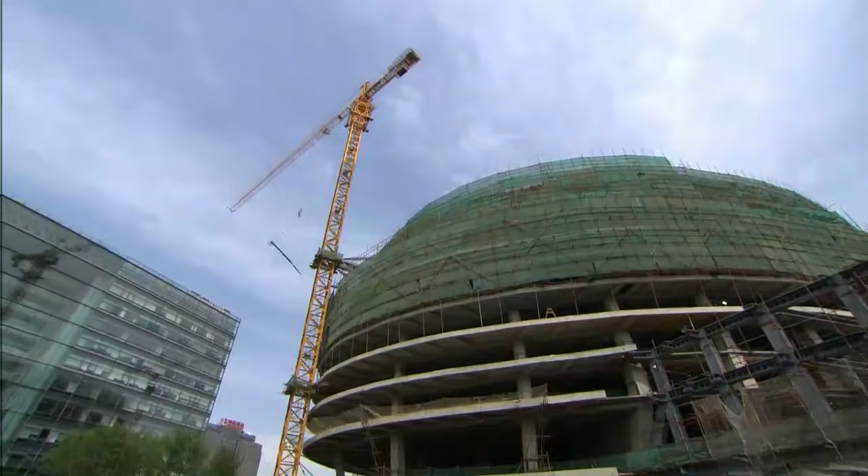21st century China is a nation on the rise. Its economy and industry growing at lightning speed. But the country faces a huge challenge. The north is drying up. China's growth is threatened.

Northern China's water shortage is affecting its social and economic development. The situation is critical. Enter one of the most ambitious engineering projects of modern times. The South to North Water Diversion Project is absolutely essential for solving North China's water shortage.

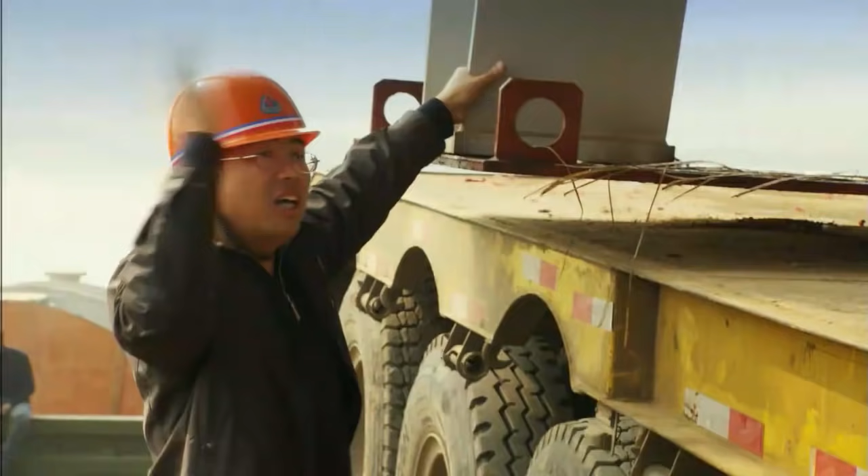A record-breaking chain of waterways, dams, tunnels and giant aqueducts to rescue China's parched north. Nothing has been tried on this scale before. It's a giant gamble. China's engineers are stepping into the unknown.

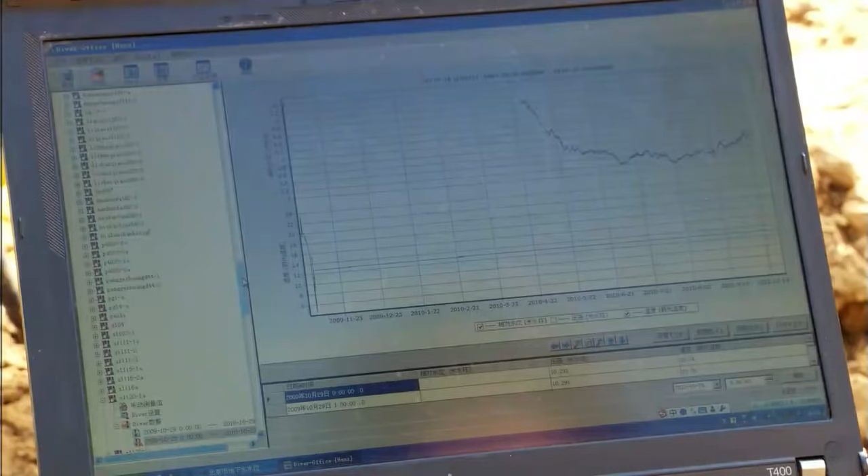6 a.m. on the outskirts of Beijing. Two researchers carry out a reconnaissance in China's battle with nature. Their task? To monitor Beijing's underground water reserves. We collect water pressure and temperature data from these outdoor test points in order to record changes in water levels underground in Beijing.

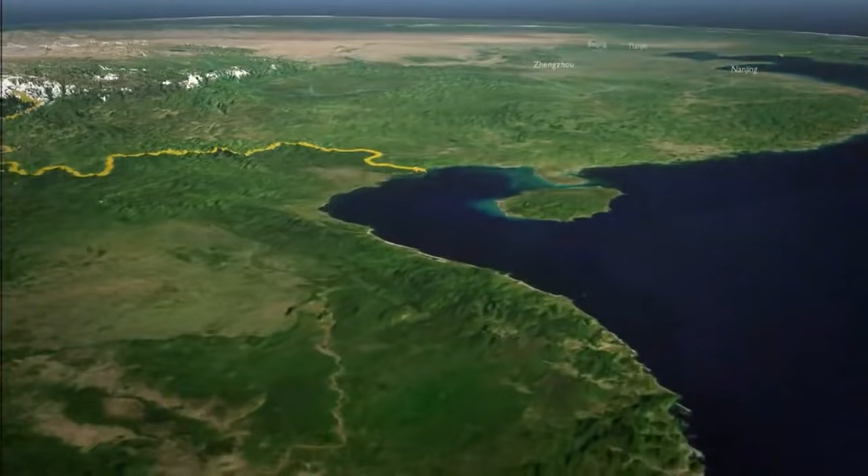Irrigated by some of Asia's largest rivers, southern China is green and fertile. But the north is a different story. Few rivers and low rainfall make this region of China naturally dry and semi-arid. Add intensive agriculture, rapid urban development and climate change to the mix, and the situation becomes critical.

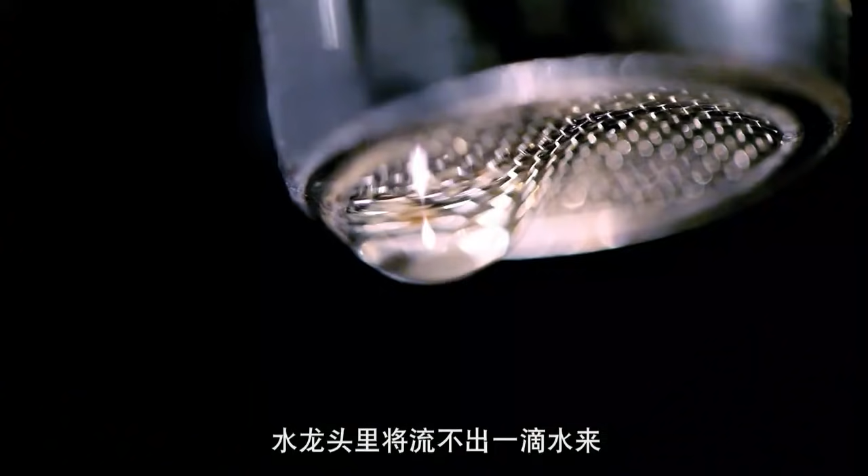If nothing is done, scientists estimate by 2030, northern China's taps will completely run dry. The shortage of water in northern China is caused by the region's dry climate. Population growth and economic and social development have made the situation even worse.

Something must be done, and fast. So, enter the three-pronged South-North Water Diversion Project. Still in the planning stage, the western route will divert water from the Yangtze headwaters to replenish the Yellow River. The 1,267-kilometre central route will divert water from the Han River to the northern cities of Beijing and Tianjin.

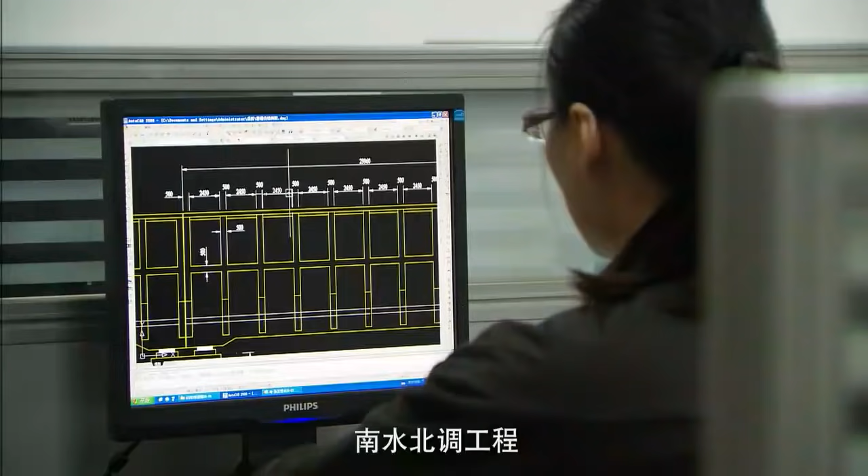If we don't move water from other regions and build the South-North Water Diversion Project, it'll be impossible to support economic and social development in the north. The most important link in the chain is the source of the central route.

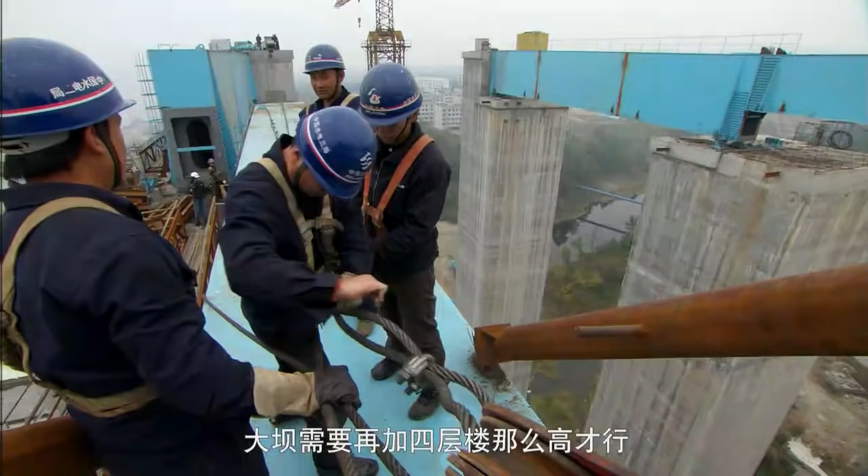Danjiangkou Reservoir will be the giant water tank feeding the taps of northern China. It holds enough water to supply New York City for 13 years. That's not enough to quench the North's thirst. The reservoir's capacity must increase by a massive 60%. But the Danjiangkou Dam is too small to hold that amount of water. It needs to grow in height by an extra 4 stories.

Building a new dam is like drawing on a blank piece of paper. You design how you like, but to enlarge a dam, you have to first carefully study the old one before putting pen to paper. Zhang Xiaoting is the dam's chief engineer. He must enlarge the 50-year-old dam using new concrete.

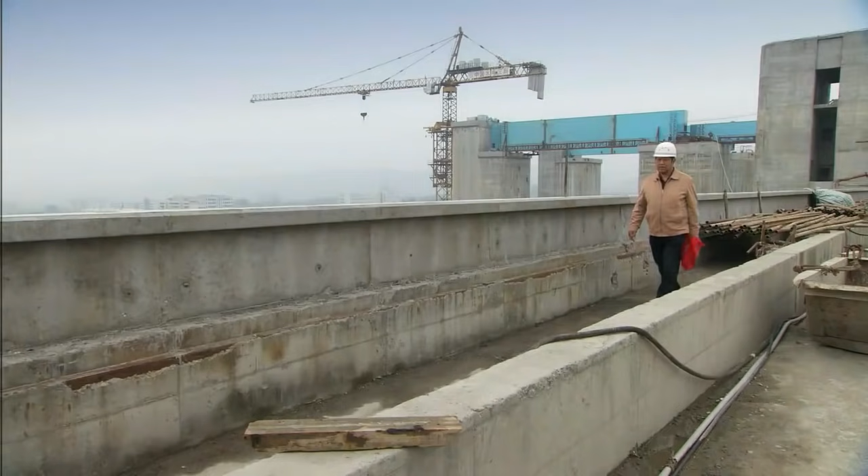The problem is, different vintages of concrete don't mix. When poured and set as one structure, standard construction concrete can withstand hundreds of kilograms of pressure. But if new concrete is poured directly on top of old, it's a different story.

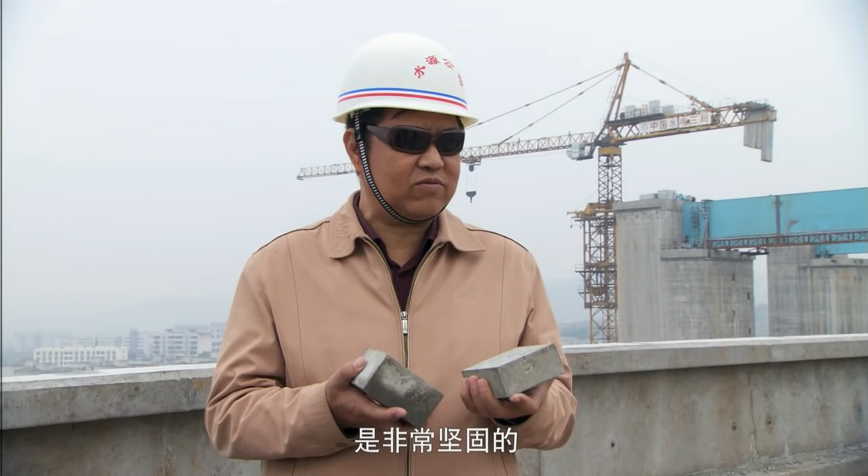This experiment shows that, despite concrete being strong, if we pour new concrete on top of old without surface treatment, the combination is fragile and weak. It breaks apart with very little force. Scaled up, this weakness would spell disaster.

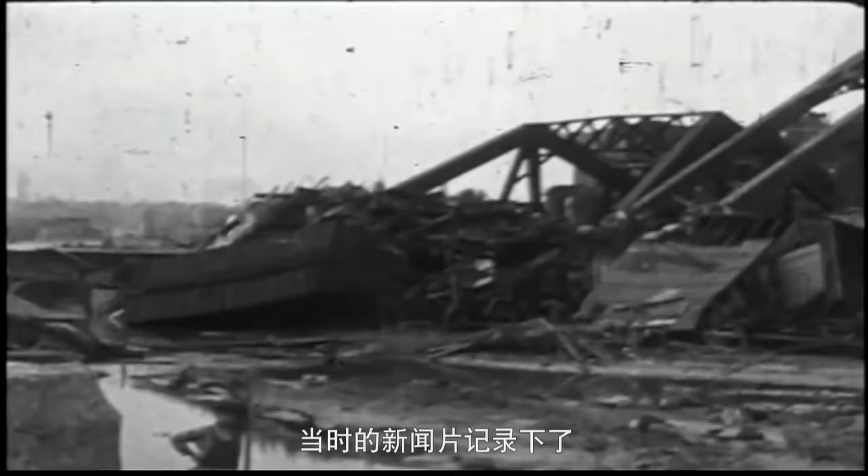In 1928, the St. Francis Dam in California collapsed, releasing a wave that swept everything before it. 450 people were killed. Newsreel depictions showed the horrifying scale of the disaster. Later analysis revealed the dam's failure was due in large part to the poor join between its concrete wall and the rock valley.

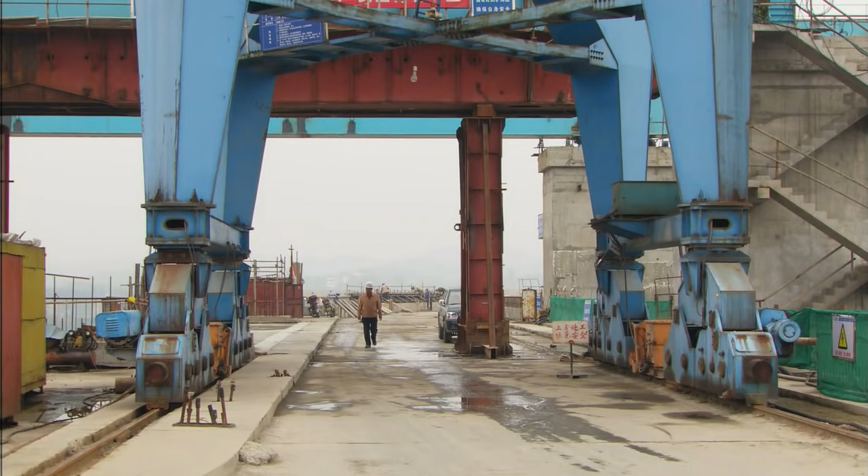This scenario is engineer Zhang's worst nightmare. He knows he must forge an indestructible bond between the old and new portions of the Danjiangkou Dam. So, he's brought in the demolition guys. Beginning in 2005, teams of explosive experts blew apart the dam's upper layers.

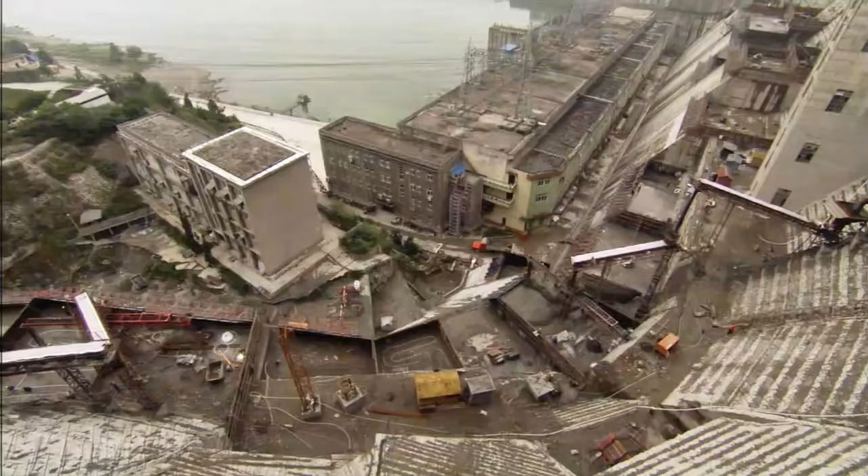And painstakingly scoured long grooves across its face. Next, Zhang's engineers drilled thousands of steel rods into the dam's broken-up exterior. Together, the chiseled grooves and steel rods anchored the fresh concrete poured on top, creating a super-strong bond between the old and new structures.

Over 4 years, the dam grew centimetre by centimetre, both in thickness and height, eventually reaching the 50-story target in 2009. The first building block of the world's most ambitious construction project is complete. Zhang reflects on his team's work.

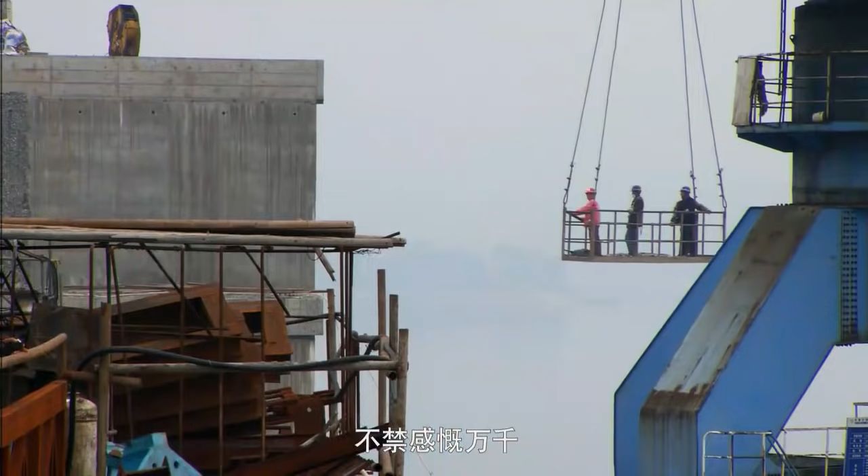When the Danjiangkou Dam heightening project is complete, we hydro engineers will be very proud to see water from the Han and Yangtze rivers helping the people of Beijing and Tianjin. The central route of the water diversion project is off to a good start.

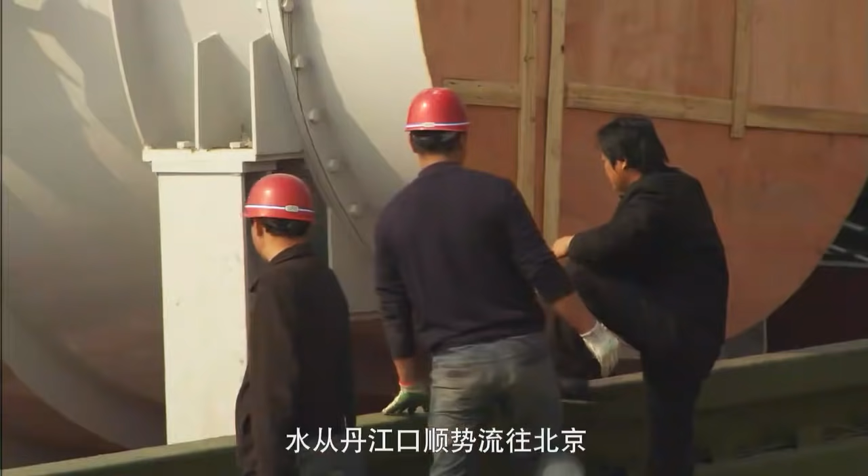From Danjiangkou, it's downhill all the way to Beijing. But over on the eastern route, engineers face an uphill battle, literally, to get the water to northern China. Dawn in Shandong province. The engineers building the Hanzhuang pumping station are up early.

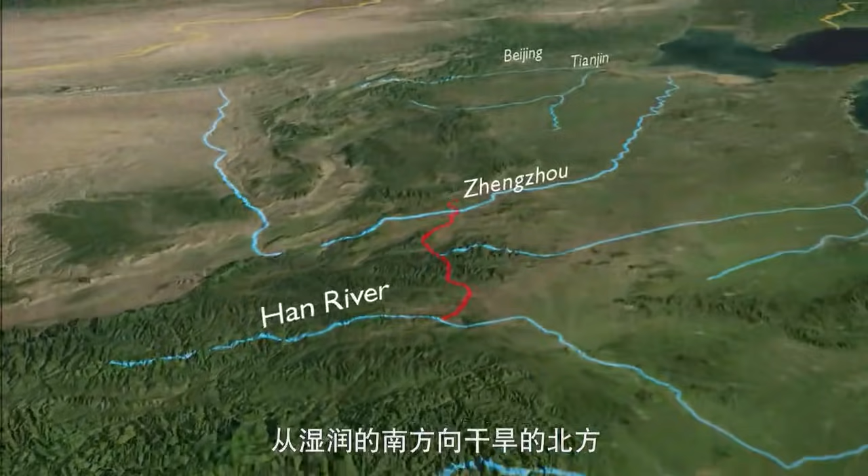The South-North Water Diversion Project will eventually divert almost 50 billion tonnes of water each year via 3 routes from the wet south to the parched north. Engineers hope 5 state-of-the-art pumps will be the driving force behind the project's eastern route, if the delivery goes smoothly.

For half of its 1,467-kilometre length, the eastern route's gradient is uphill. Without help, water the engineers want to go north will flow the wrong way. Their ambitious solution is building 22 pumping stations to push the water in the right direction. Ninth in the chain is Hangzhuang. It will pump water north into a series of lakes. The man in charge of its construction is Chief Engineer Zhao Xiaomao.

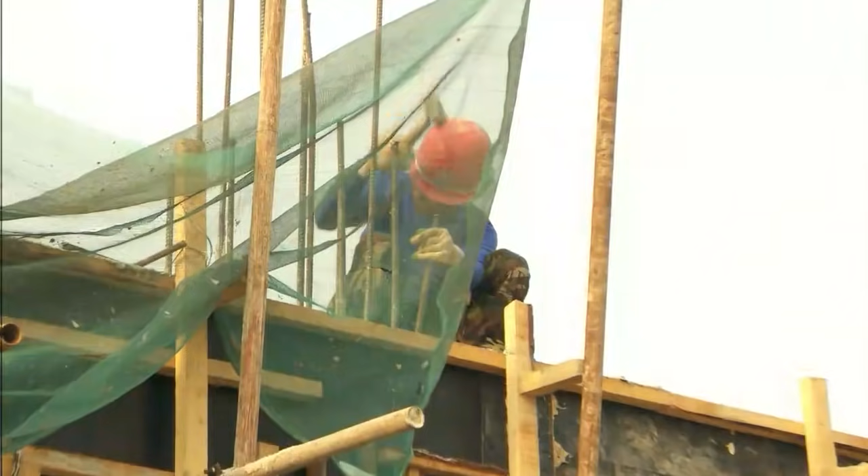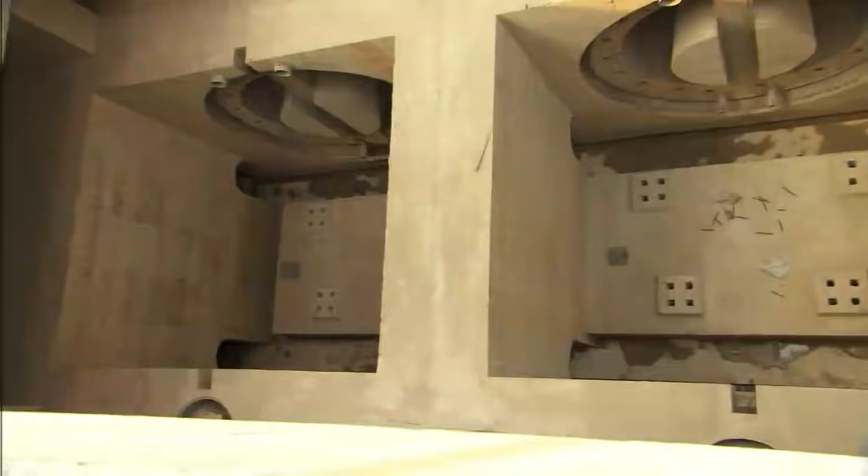His station must pump water up a steep incline at a rate that would fill 3 Olympic swimming pools every minute. 5 pumps at the bottom of the structure will do all the pushing. They work by spinning angled blades called impellers. These give water enough energy to overcome gravity. But pumping that much water 365 days a year makes for one big electricity bill. Zhao's team must find a way to keep costs to a minimum.

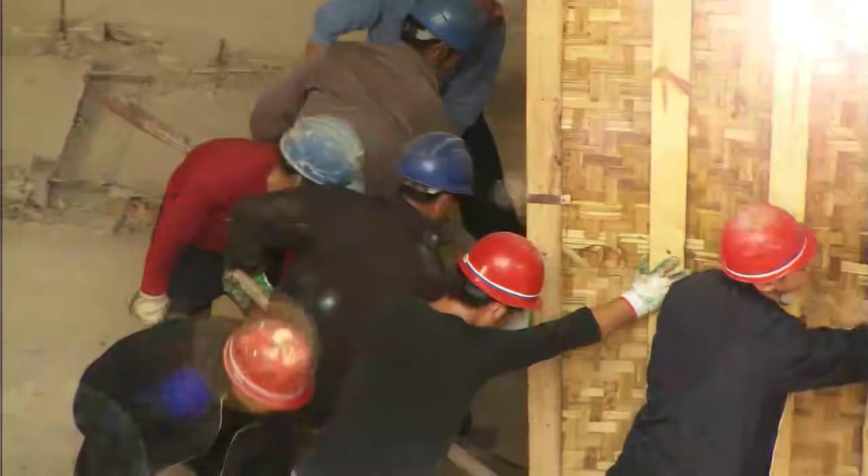During the design of the Hanzhuang pumping station, everyone wanted to increase the pump's efficiency. It's the most important aim of our design. A pump's induction motor achieves an efficiency of around 75%. The rest is lost in friction and heat. Hangzhuang's engineers needed more than 81% efficiency. To meet their target, they turned to state-of-the-art technology.

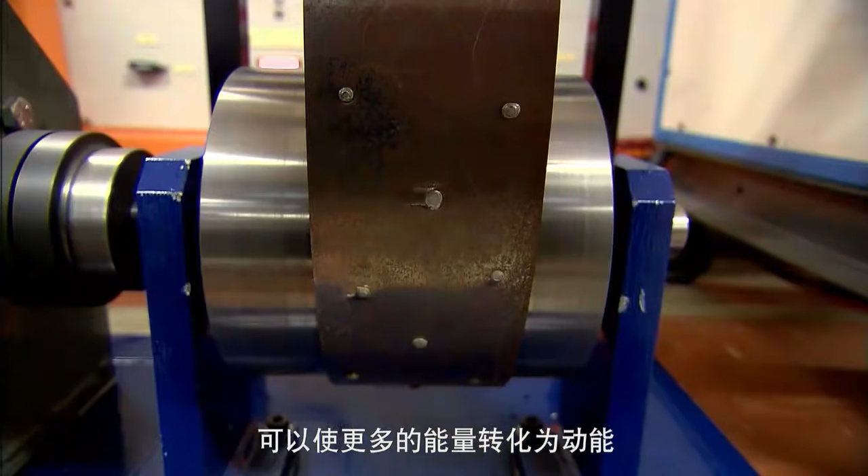Dr. Patrick Luk is a world expert on the mechanics of permanent magnet motors. Their components are made from rare supermagnetic metals. The result is more energy is converted into motion. Put head-to-head with an induction motor, these rare metals make a dramatic difference to efficiency.

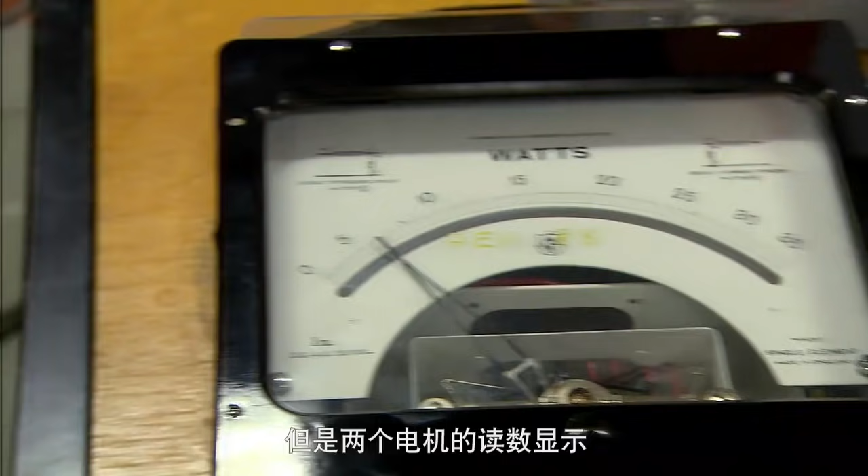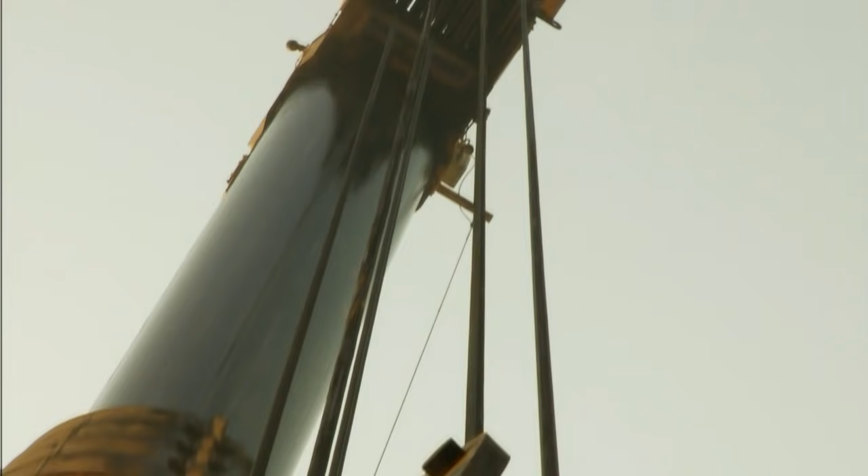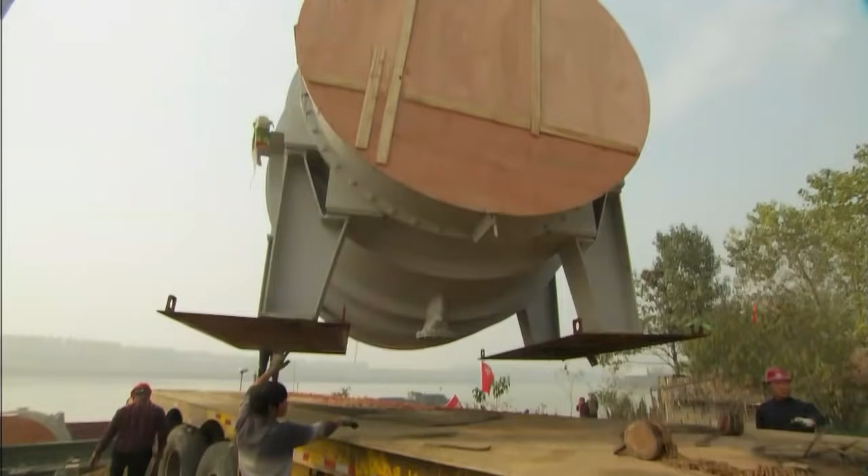But before they're up and running, Zhao needs to get his hands on them. Which means moving 300 tons of pump worth millions of dollars off the delivery barge and onto dry land. To make the move, Zhao's ordered a giant 80-ton crane. He holds his breath as the first 60-ton pump is lifted into the air. The pump finally touches down.

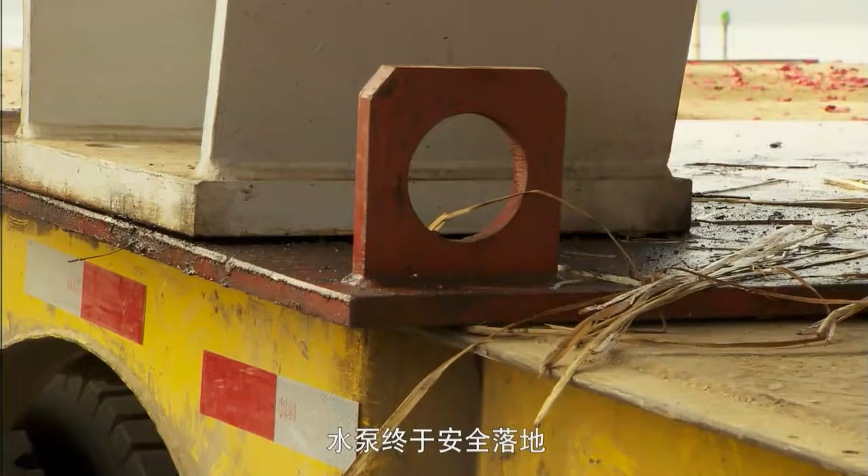In a week's time, Zhao and his team will begin installation. After the preparation comes the installation stage. I feel excited because after that, construction of the pumping station is more or less complete. By sunset, the last of the pumps is offloaded onto terra firma. Construction on the eastern route stays bang on schedule.

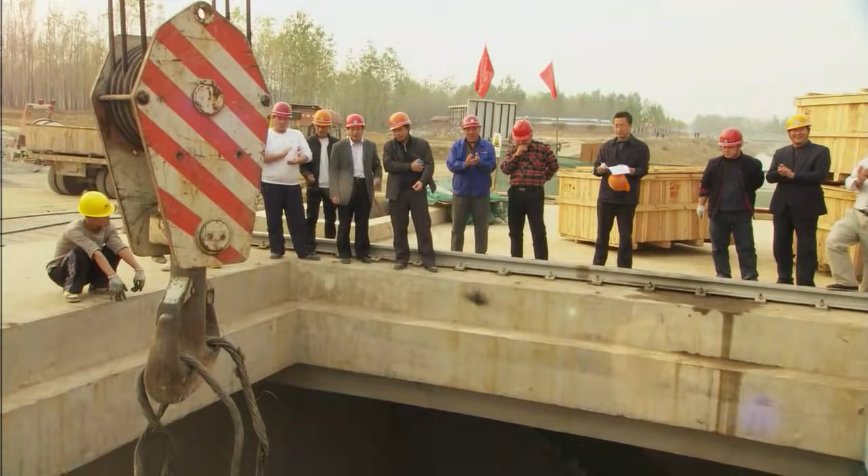But the central route has reached one of the most challenging obstacles on its 1,200-kilometer journey. The Sha River. A complex, unpredictable waterway with tough geology. To cross it, engineers must design a record-breaking solution.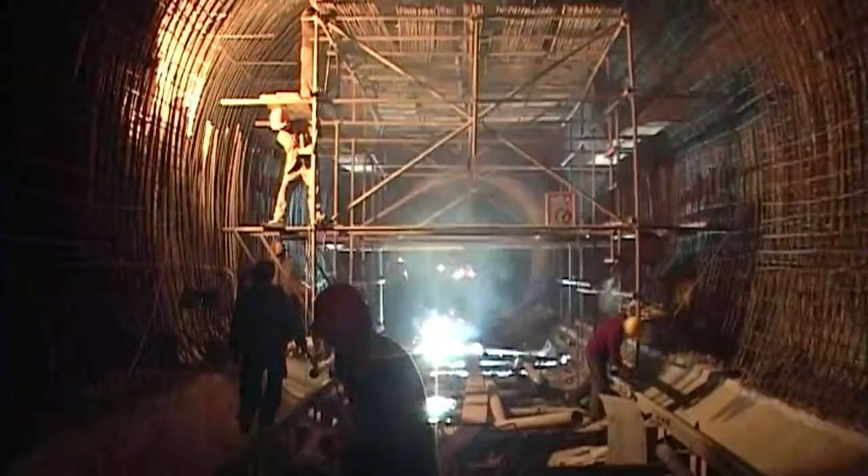Northern China, October 2009. The worst drought here in 60 years has dried up riverbeds, withered crops, and left millions facing severe water shortages. With rainfall decreasing year by year and groundwater reserves at critical levels, the region's future is under threat. China's remedy is on a grand scale. A network of man-made waterways to convey billions of tons of water from the lush south to the dry north.

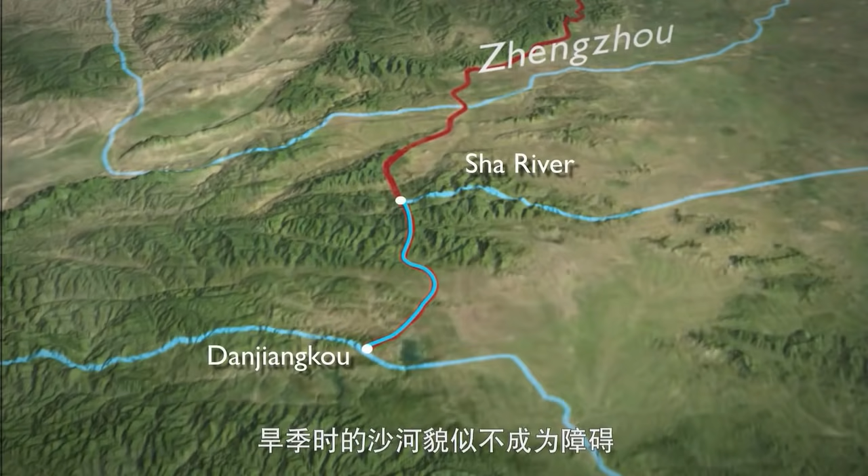The project's central route will take water 1,200 kilometers from Danjiangkou Reservoir to Beijing. Just 200 kilometers into the journey, it meets the Sha River. In the dry season, the Sha doesn't look much of an obstacle. But this narrow river is at the center of a much wider geographical feature. From the air, the extent of the river's wet season meanderings is revealed. The best way to take the diverted water across is by a giant aqueduct high above the Sha that spans the entire area.

Step forward Zhao Tinghua of the Henan Water and Power Engineering Company. The team are designing an aqueduct with the best combination of strength and low weight to span the Sha. They have millennia of raised aqueduct construction as inspiration.

2,000 years ago, Roman engineers built hundreds of kilometers of them to quench the thirst of the empire's cities. Rome itself had a network of rectangular channeled aqueducts supplying the capital with daily water. In the 21st century, Chinese engineers evolved the tried and tested Roman blueprint with the Sao River Aqueduct. Its flow capacity was a Chinese record.

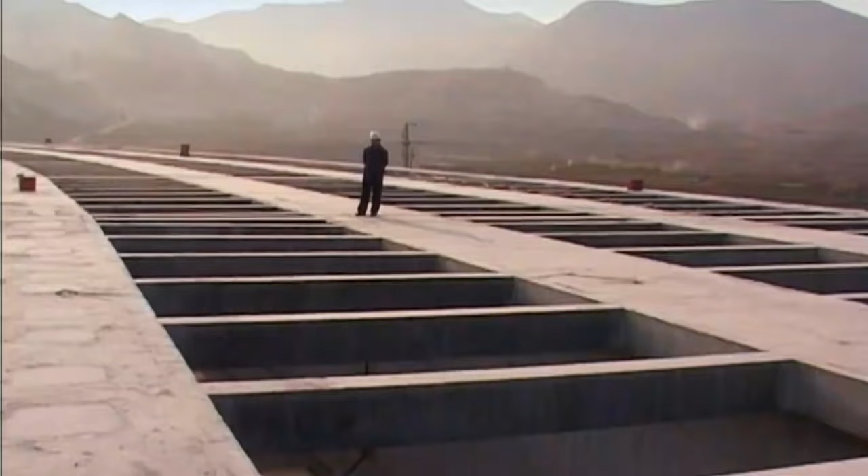Zhao's design to cross the Sha must go even further. He must rewrite the record books once again and double the Sao's flow capacity to a rate that can fill an Olympic swimming pool in 6.5 seconds. That means it's got to be big.

But the Sha's geology is so soft that a heavy aqueduct will sink into the ground unless it has massive reinforcement. And that would double the project's cost. That's a no-go. So Zhao set his team the challenge of designing an aqueduct that was strong, but also very light. After months of testing, they think they found the answer. Exchange the traditional rectangular shape for a new profile, the U shape.

We found that a U-shaped aqueduct has many advantages over a rectangular shape. Structurally, it's better at bearing heavy loads and is stronger. Hydrodynamically, it's better. And during construction, quality control is easier to achieve.

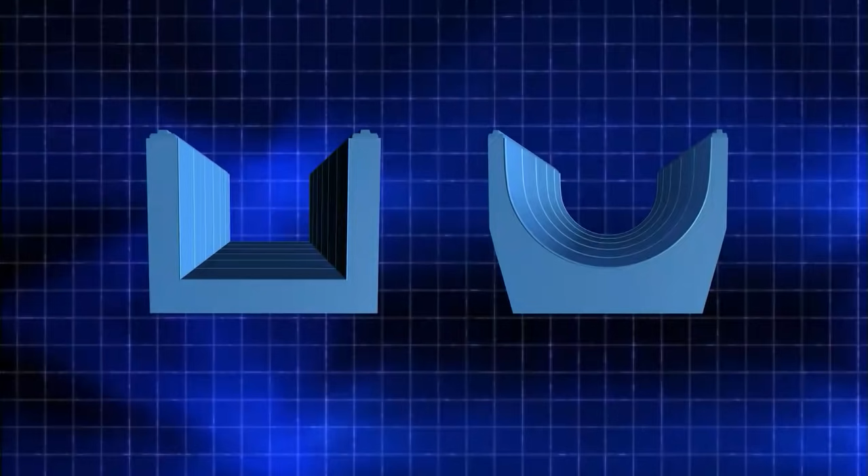The tests reveal that when filled with hundreds of tons of fast-flowing water, a rectangular design's 90-degree angles are put under extreme stress. But the sweeping curve of a U-shaped aqueduct has no stress points, allowing construction of stronger and so lighter channels.

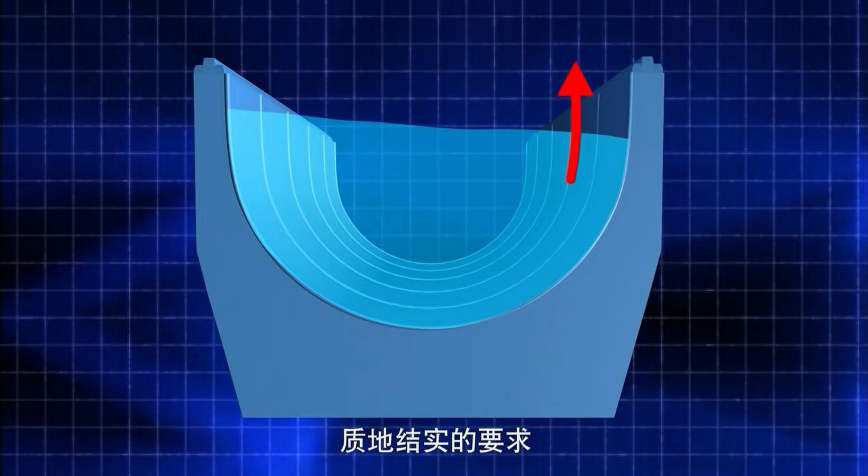The U-shape approved, Zhao's team pieces together the aqueduct's blueprints. 200 individual sections, each weighing the equivalent of 3 fully loaded airliners, make up 2 channels. Supporting them is a series of giant concrete piles. We have invested a lot of manpower and energy designing the Sha River Aqueduct. We are looking forward to the completion of the project and seeing the water transferred to the north.

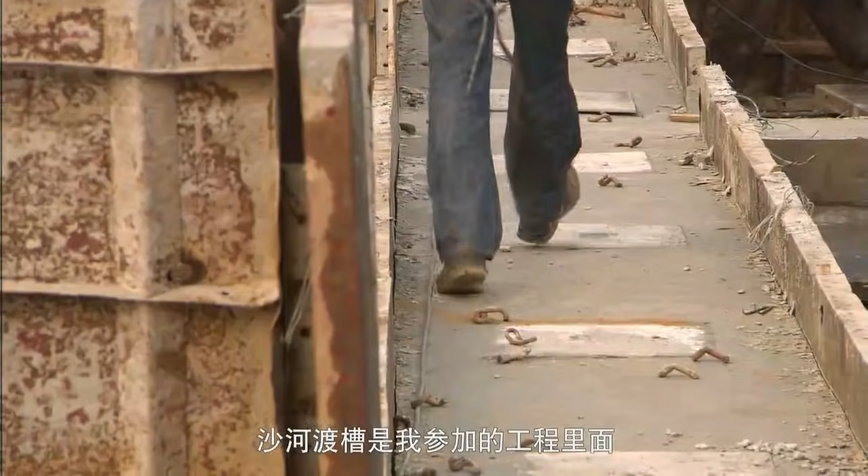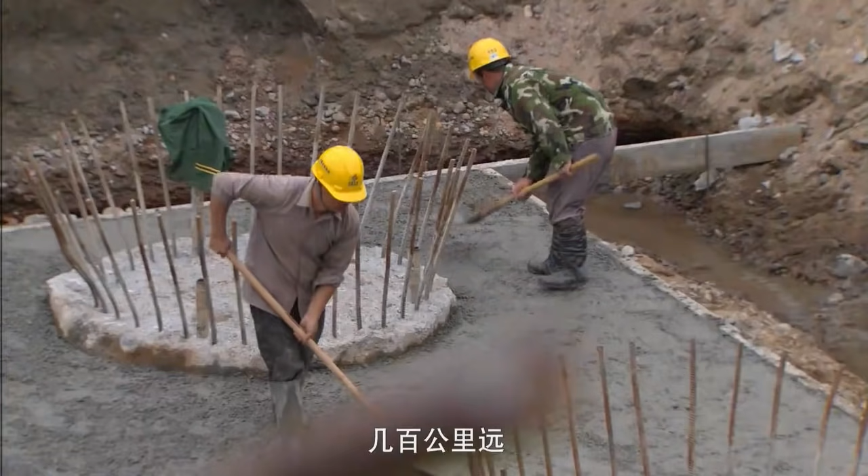Design complete, Zhao passes the baton to the man responsible for building it. Chief Engineer Wang Penghui. This project is the most difficult I've worked on. To make a concrete aqueduct of this scale and then install it is unprecedented in China. To make matters worse, the construction site is hundreds of kilometers from a factory that could prefabricate the aqueduct sections. So Wang has to build each one from scratch, right here on site.

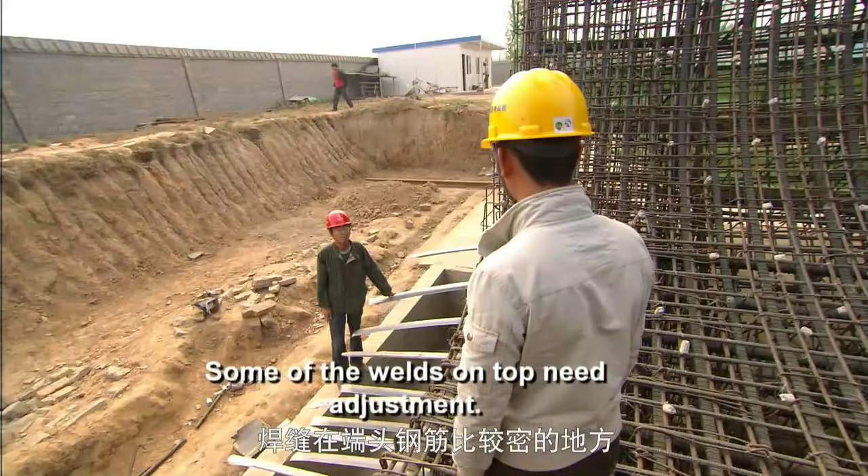Each skeleton section requires almost 14,000 steel bars. The entire aqueduct rests on the precision of every weld. Each one is meticulously checked and double-checked.

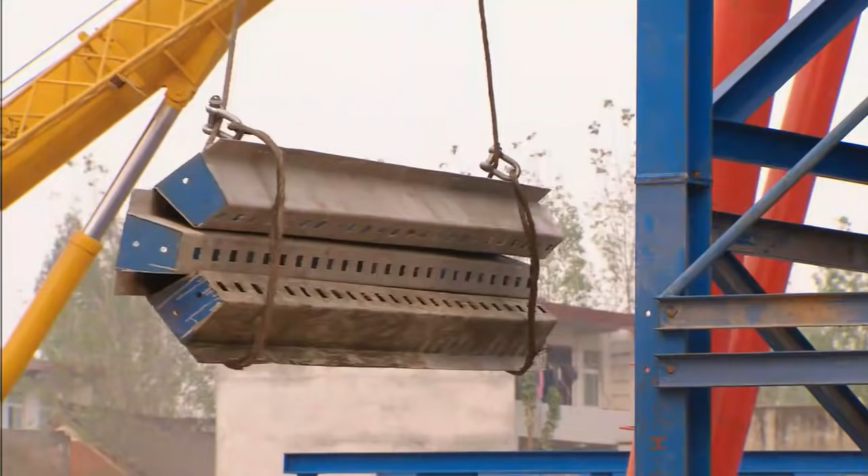After passing quality control, workers sandwich the steel skeleton between 2 halves of a mold and pour concrete inside. Once set, they remove the mold and the section is ready for installation. For that, Wang needs a machine capable of some serious heavy lifting. So he's called in the largest crane ever used on a Chinese aqueduct construction project. The height of a 13-story building.

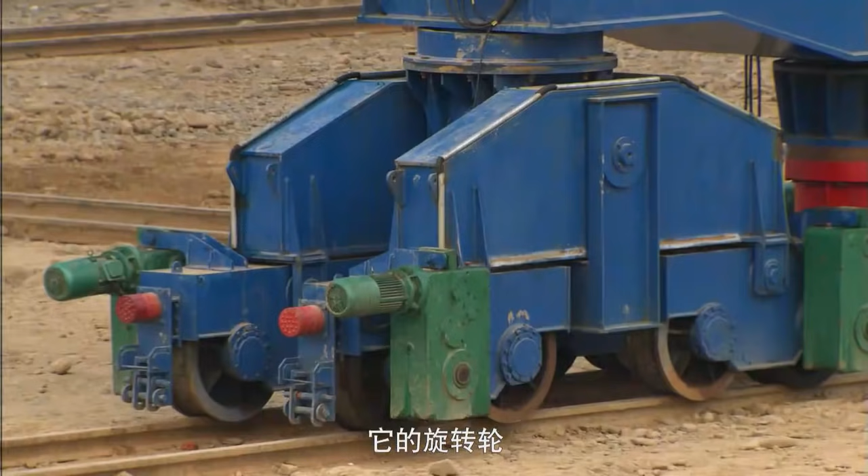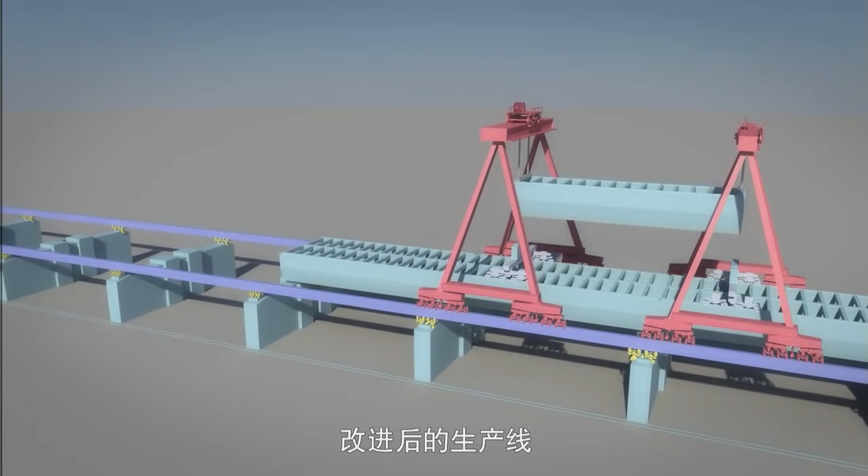What makes it special are its swiveling wheels that allow it to move to any part of the site, and its role in an ingenious installation process. The crane will lift each 1,200-ton section onto a trolley positioned on top of the aqueduct. The trolley then rolls the section down the aqueduct to the installation area. When in position, a second crane will lift and place each section on top of its support piles. This innovative production line will make and install 3 giant aqueduct sections a week.

Today, Wang has a special visitor. For the first time, Zhao from the design team is on site. He wants to find out whether his U-shaped design is causing any problems.

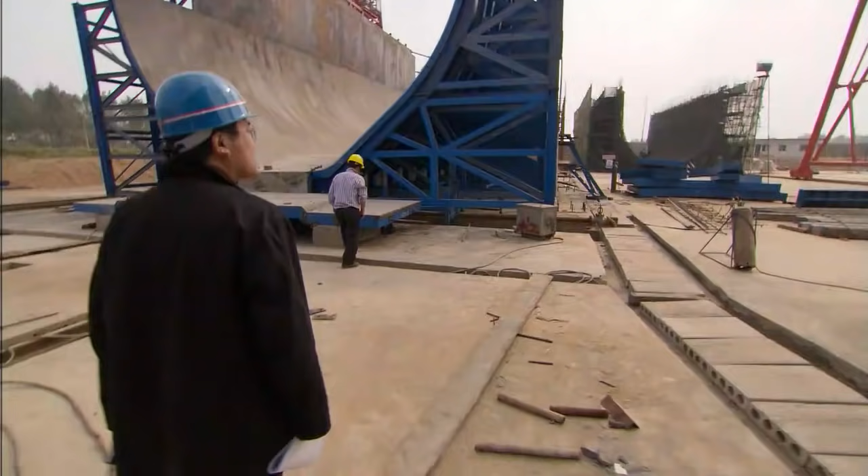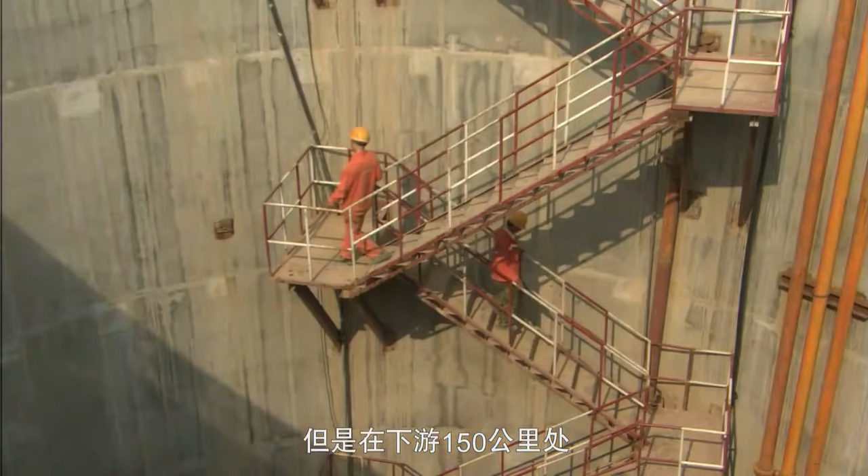After a thorough inspection, Zhao delivers his verdict. I'm very excited because we are seeing the results of all our hard work. Once the Sha River aqueduct is complete, water will pour northwards to Beijing. But 150 kilometers downstream lies the biggest obstacle on the central route, the mighty Yellow River. Crossing it will test Chinese engineering prowess to the limit.

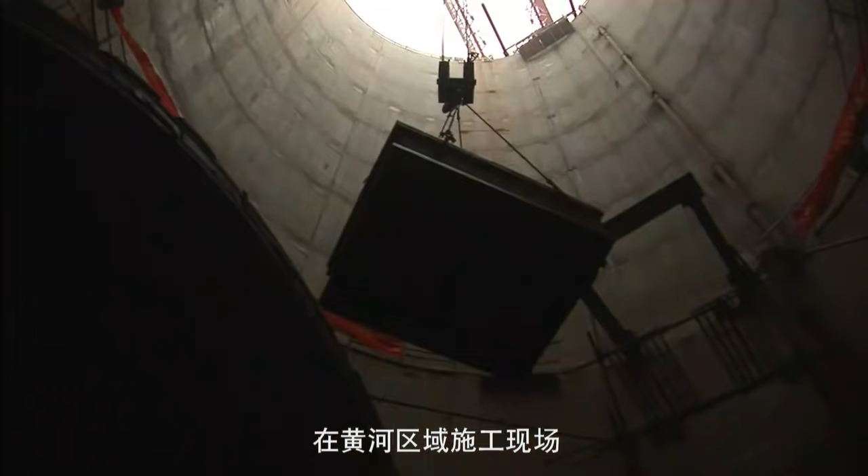Midday at the Yellow River construction site. Work has come to a grinding halt. Deep underground, the giant machine tunneling beneath the riverbed has broken down. Every minute it's out of action, the project falls behind schedule. The clock is ticking. For the engineers and workers on site, getting it back up and running is top priority.

The tunneling is part of the world's largest construction project. 3 man-made waterways that will divert close to 50 billion tons of water each year from China's wet south to the dry north. 350 kilometers into its journey from Danjiangkou to Beijing, the water of the central route must cross the mighty Yellow River.

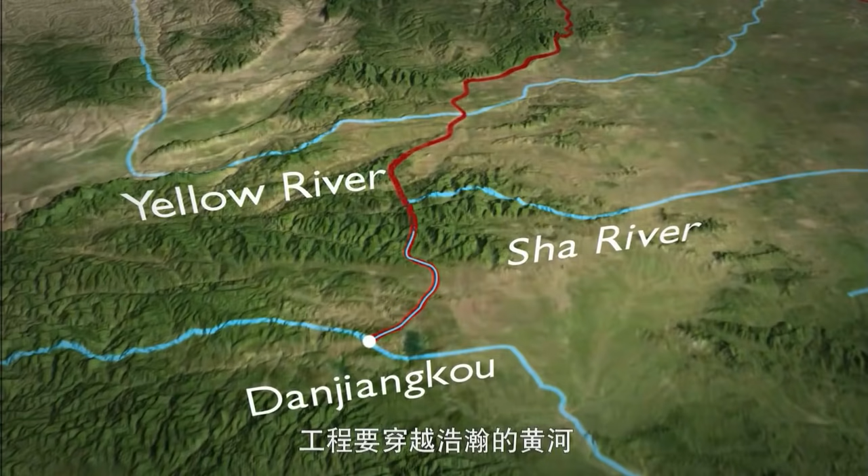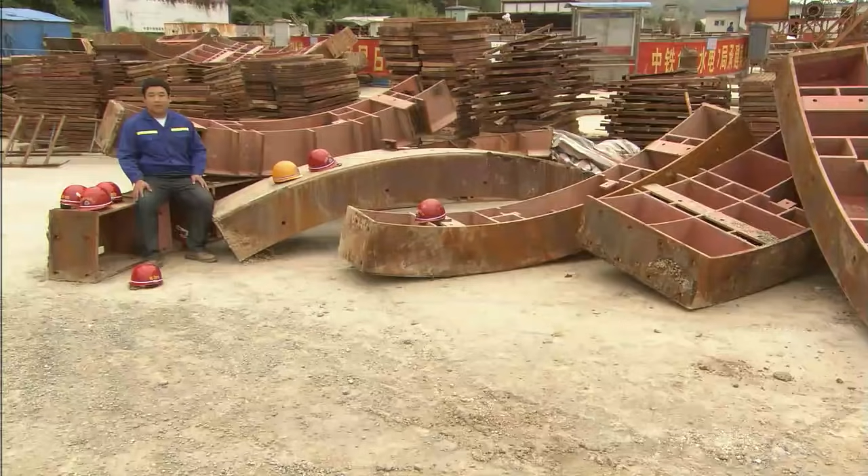It's the world's 6th longest waterway. And at the intersection with the central route, it's 700 meters wide. The success of the South-North Water Diversion Project depends on finding a way across. A job that's fallen to Chief Engineer Cao Jianfeng.

He's implementing an ambitious plan. The digging of a pair of 8-meter-wide tunnels, each 4 kilometers long, to convey the equivalent of 1 million bottles of water per second under the Yellow River.

This is the most difficult project I've worked on. We have to dig a 30-meter deep tunnel under the river, which with all the unexpected problems we're going to encounter is very challenging. The tunnels must take the water downhill, under the riverbed and then back up, emerging above ground on the Yellow River's north bank.

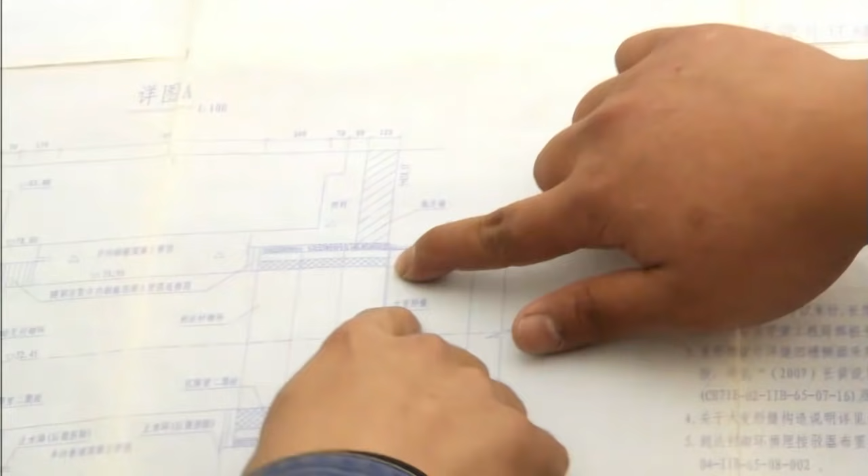The problem is, water doesn't flow uphill. Their solution to this problem is ingenious in its simplicity. Common sense suggests that water flows from a high to a low elevation. But not so obvious is that water in a pipe will do this even if for part of its journey it dips below the elevation of its endpoint and is forced to travel uphill.

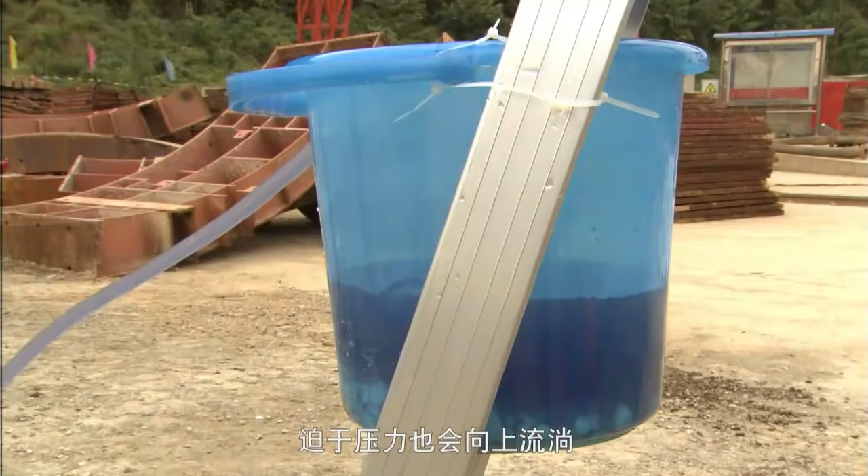If this is the south side of the tunnel, and this is the north side of the tunnel, the water is pushed through from one side to the other due to the pressure difference caused by gravity. The designers of the Yellow River crossing took this principle and scaled it up, carefully ensuring that the tunnel's exit points were lower than their entry points.

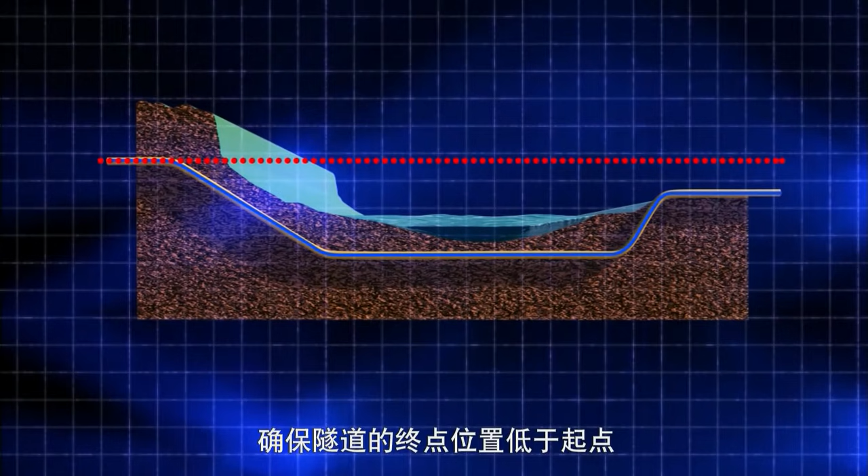The design in place, Cao now needs to dig the 2 4-kilometre tunnels under the Yellow River. So he's called in some heavy metal. Weighing in at 980 tons, the tunnel boring machine, or TBM, drills through the ground using fierce-looking blades mounted on a cutting head. Judging by its size and mean looks, you might think the TBM is unstoppable. But as engineer Cao has discovered, this mighty machine has an Achilles heel.

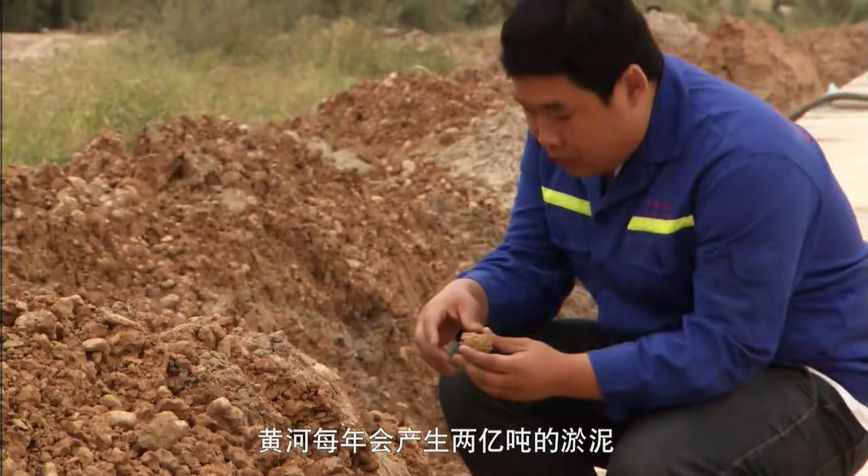Each year, the Yellow River dumps 200 million tons of silt along its course. And it turns out this is a TBM's worst nightmare. The biggest challenge for the TBM digging under the Yellow River is clay. This clay is dry, but underground, it's very thick and sticky. The clay can stick to the cutter head and jam it, making digging very difficult.

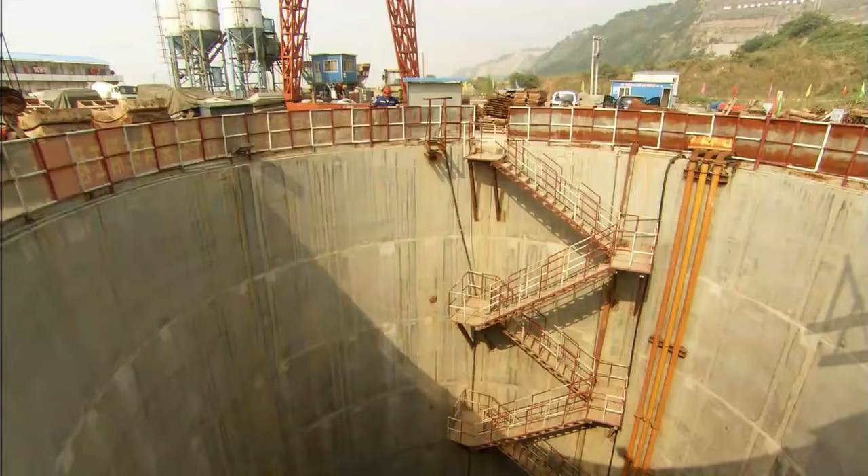And today, the Yellow River's testing geology is about to give Cao a big headache. The TBM has come to a standstill. It looks like the cutting head may be jammed. His only option is to send workers down to find out what's wrong.

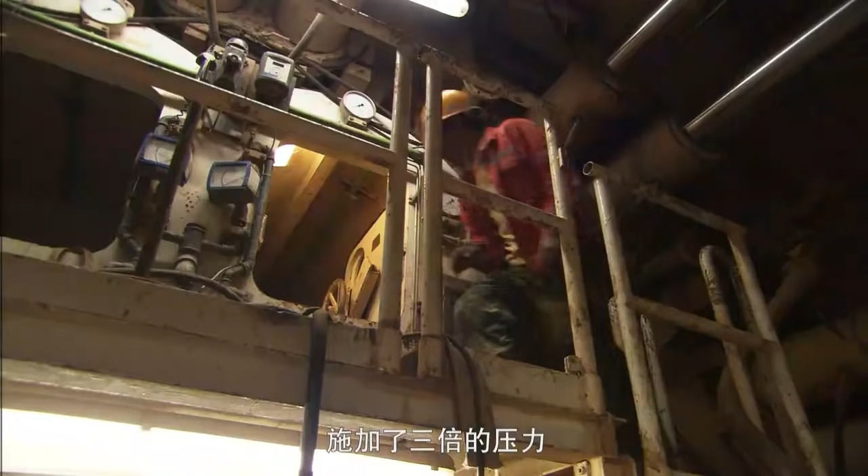Diagnosing problems with the TBM is a dangerous business. To maintain good contact with the cutting surface, the TBM's blades are pressurized to 3 times atmospheric pressure. Workers must spend time in a hyperbaric chamber to adjust their bodies. Any mistakes, and just like a deep-sea diver, they could suffer the bends.

But it's a process that takes over an hour. The project is losing time and money. Engineer Cao needs his TBM operational and fast. And if that's not bad enough, 600 kilometers away, scientists grapple with an even bigger problem. Widespread pollution threatens to derail the entire project.

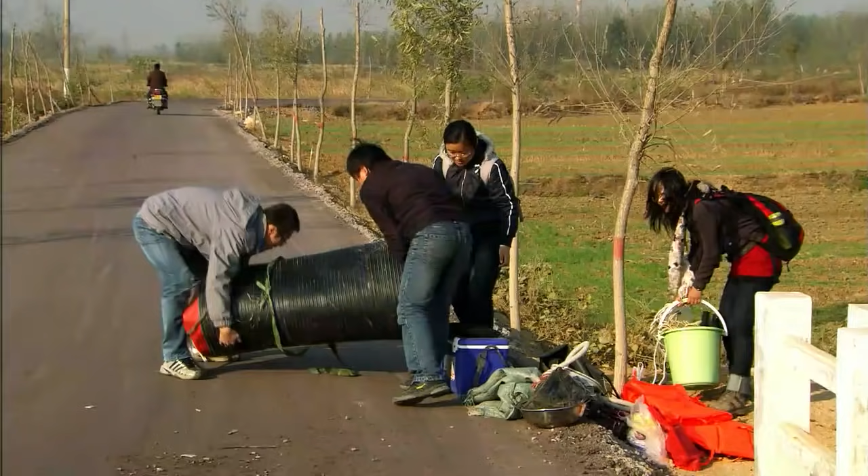Shandong Province, eastern China. A team of students from Beijing has traveled from the capital to a remote stretch of countryside. Their mission is to gather plant and water samples from an innovative biology experiment. It could avert a major threat to the South-North Water Diversion Project, the visionary plan to rescue northern China from crippling droughts.

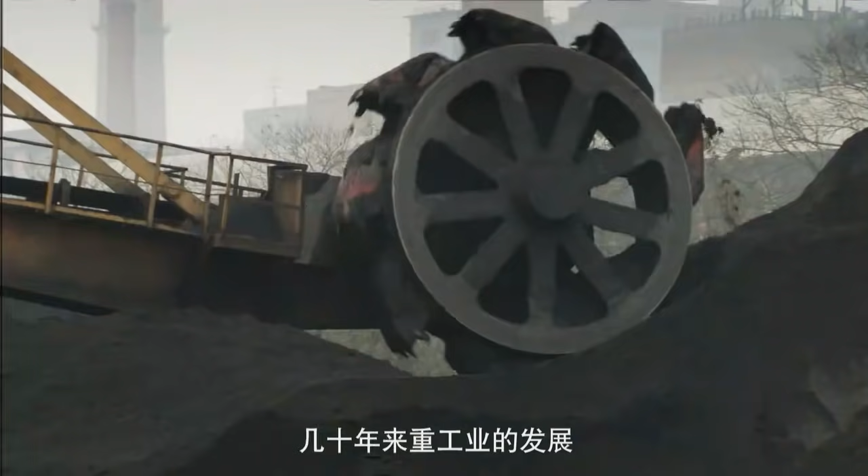Decades of heavy industry and intensive farming have left eastern China's waterways polluted with phosphates and nitrates. The danger is that the billions of cubic meters of water passing through the project's eastern route will become contaminated, making the water undrinkable once it reaches the north. The sampling team is in Shandong on the orders of the man who's been given the task of saving the project.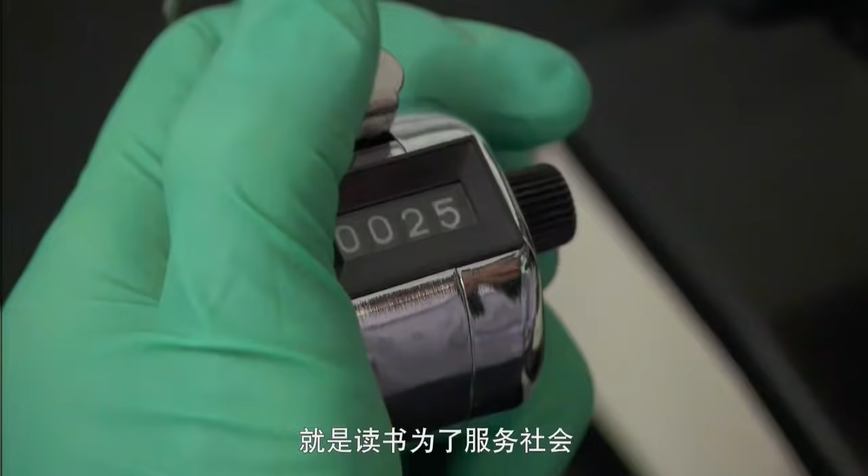Professor Zhang Huayong of North China Electric Power University. The Chinese saying goes, the purpose of learning is to serve the community. If our research can solve this problem, my students and I will be delighted. His idea is to harness nature to solve the problem.

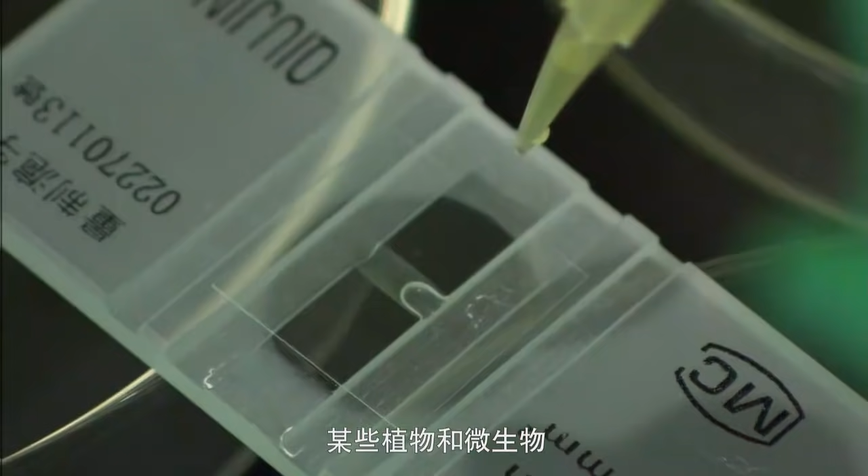Particular plants and microorganisms have the power to filter harmful phosphates and nitrates from water. If he can find the correct combination, Professor Zhang thinks these could transform the polluted areas into a purified paradise. The theory needs testing in the field. So he's planted a giant outdoor laboratory.

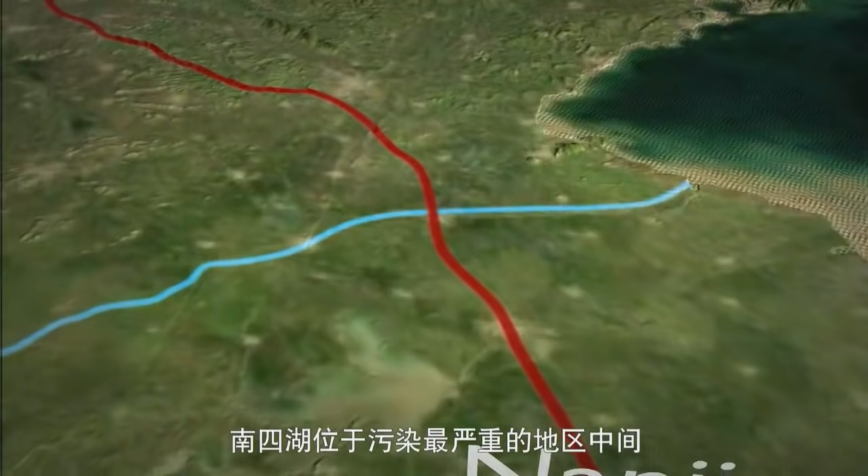And put it around a crucial section of the eastern route, the Nansi Lake. It's right in the middle of the most polluted area. Nansi Lake is a very important part of the eastern route. It's connected with 53 rivers, covering 3,000 square kilometers. If we don't solve the problem in the Nansi Lake, then the water quality of the eastern route cannot be guaranteed.

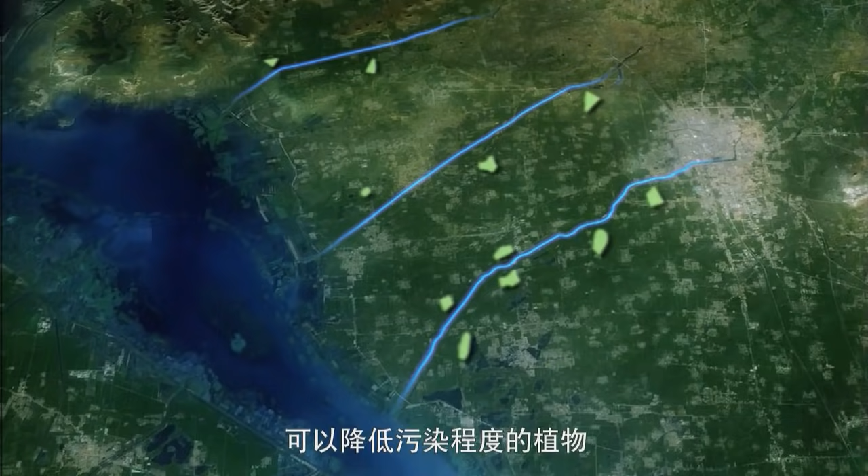Professor Zhang has created dozens of artificial wetlands, packed with pollution-busting plants and organisms, clustered around the dirty waterways feeding Nansi Lake. The scale of the cleanup is unprecedented. He needs solid data to show the ecosystem is working, which he hopes is locked in the samples the students have brought back from the field trip. They waste no time preparing the first test.

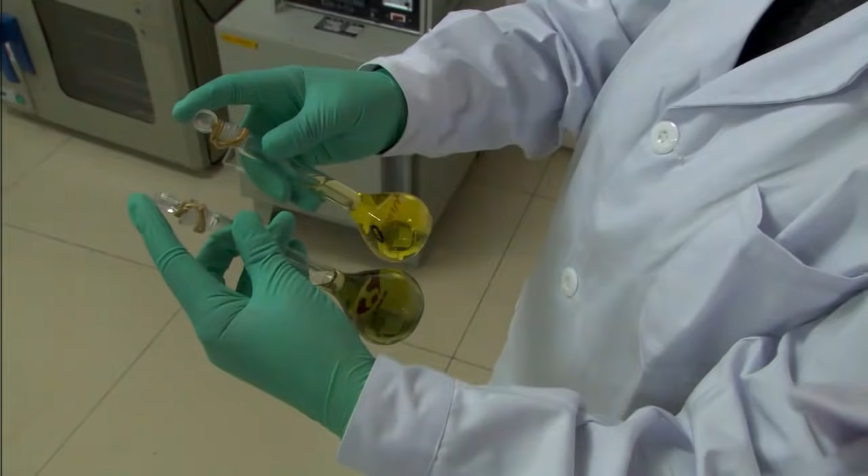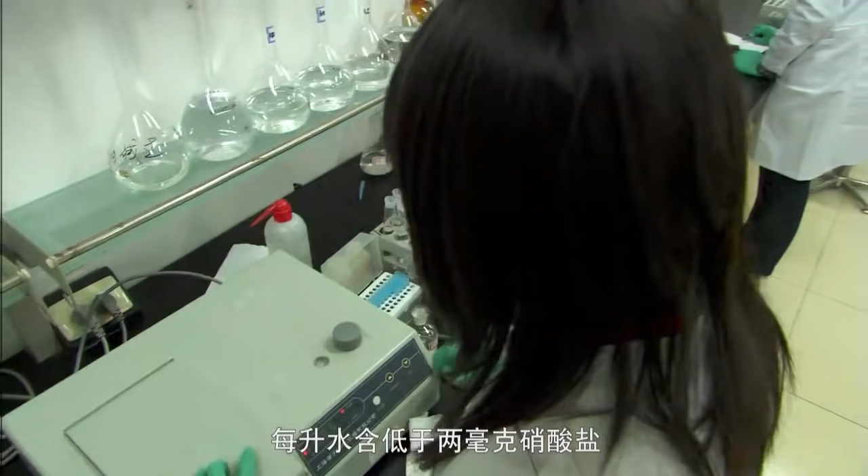It's hopeful news. Next, the students prepare tests for overall water quality. This is the key test to discover if the experimental wetlands are working. It's the moment of truth for Professor Zhang's natural purification factory. He needs the result from the spectral analysis to be below 2 milligrams of nitrates per litre. After a nervous wait, the results are in.

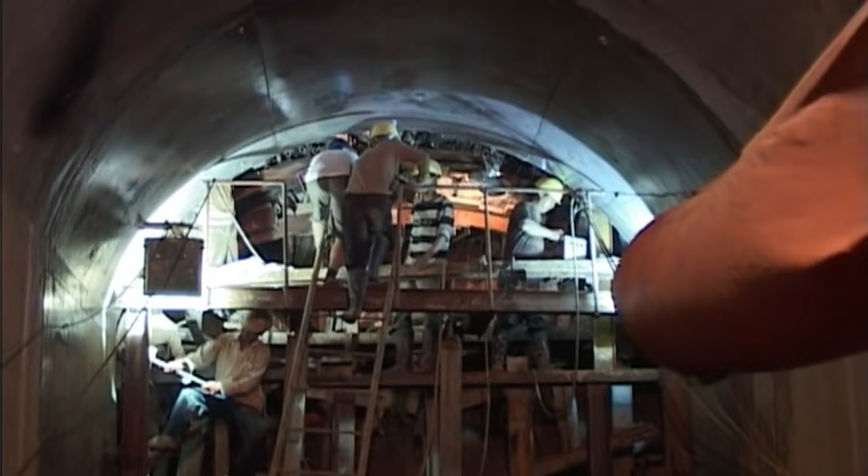But the central route still hangs in the balance. Engineers are in a race against time to repair the huge tunnel boring machine and get the ambitious Yellow River crossing back on track. Work on the South-North Water Diversion project has ground to a halt. 30 meters underground, the giant TBM machine tunneling beneath the Yellow River has broken down. Its blades are jammed, and Chief Engineer Cao is in a race against time to fix them.

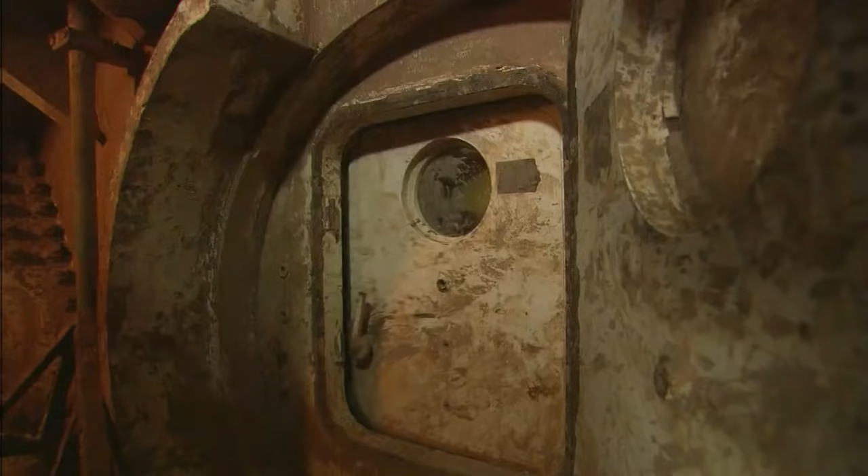2 workers sent to investigate are finishing up inside a hyperbaric chamber, necessary before entering the TBM's pressurized forward compartment. Once outside, they instantly see the problem. Sticky clay has jammed the mechanism. Time is crucial. It's very important that we fix problems with the cutter-head quickly. That's the only way we'll be able to meet our deadlines.

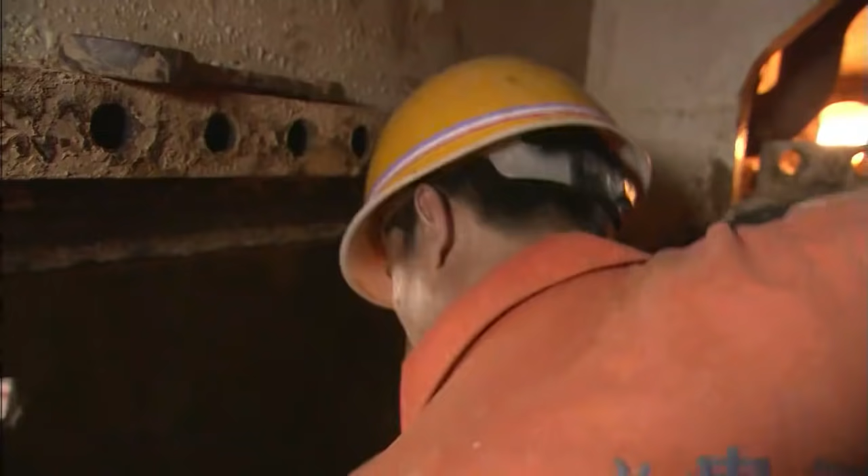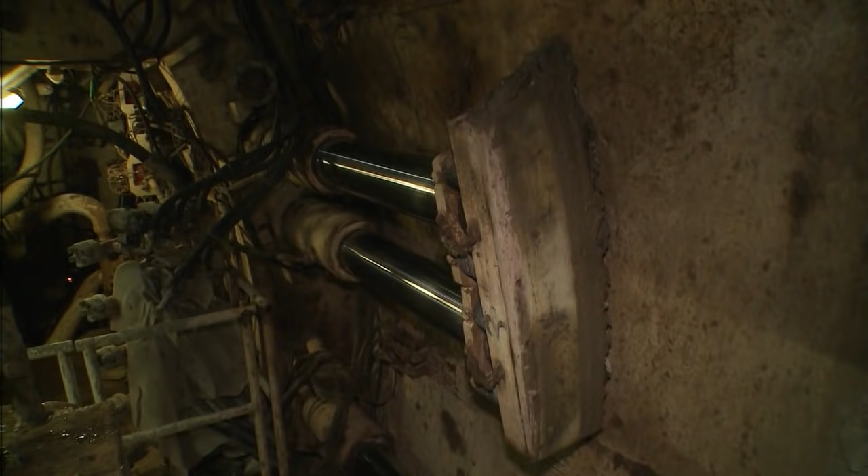After an hour of back-breaking work, the cutter head is clear. Cao patiently waits for news. With the TBM operational, the tunnel under the Yellow River is back on track. Once work is complete, the last major obstacle on the central route will be conquered. From here, water can flow downhill all the way to Beijing.

Across China, work continues on the world's largest construction project. For the designers and engineers, it's a once-in-a-lifetime experience. After its completion, the South-North Water Diversion Project will benefit huge numbers of people. Personally, I feel proud and honored to be part of this project. It's a great honor for me to participate in such a large project.

It has fulfilled my theoretical curiosity, and I feel very happy contributing my knowledge to society. I think this is an important stage in my life. The South-North Water Diversion Project will probably only happen once in Chinese history. I'm proud to be the chief engineer of the Sha River Aqueduct.

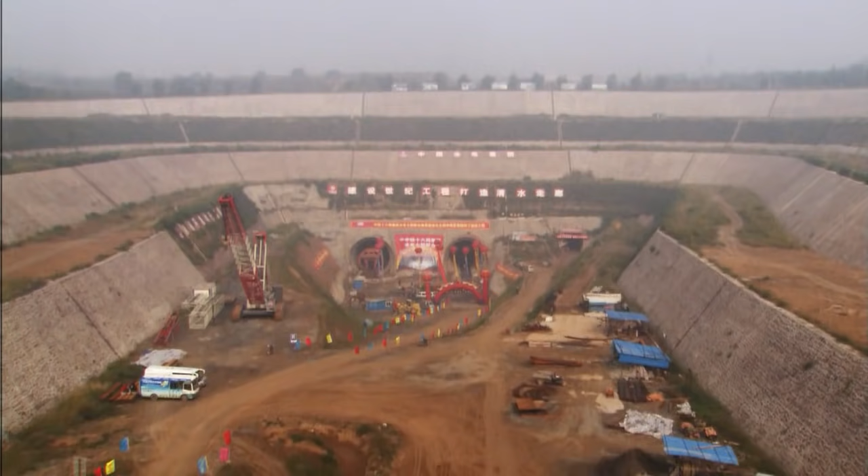But there still could be delays. Back at the Yellow River crossing site, work has once again come to a halt. Engineer Cao swings into action. But this stoppage is no cause for alarm. The TBM has finally broken through. Cao and his colleagues have succeeded in crossing the Yellow River. It's time for them to enjoy a well-deserved celebration.

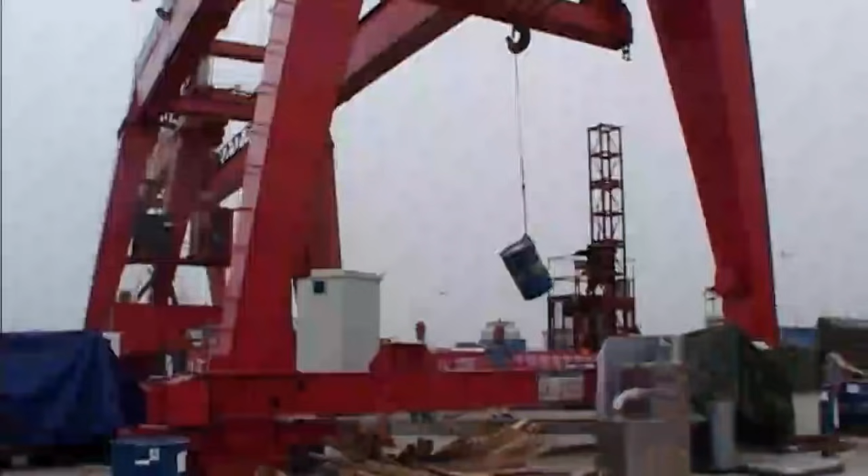The biggest reward for Cao and his fellow engineers is knowing, thanks to their hard work, the world's biggest hydro works will be fully operational by 2014. This world record-breaking system of aqueducts, canals, tunnels and pumping stations should ease the spectre of drought from China's parched north. For the moment at least, the people of Beijing and northern China can be confident their taps won't run dry.